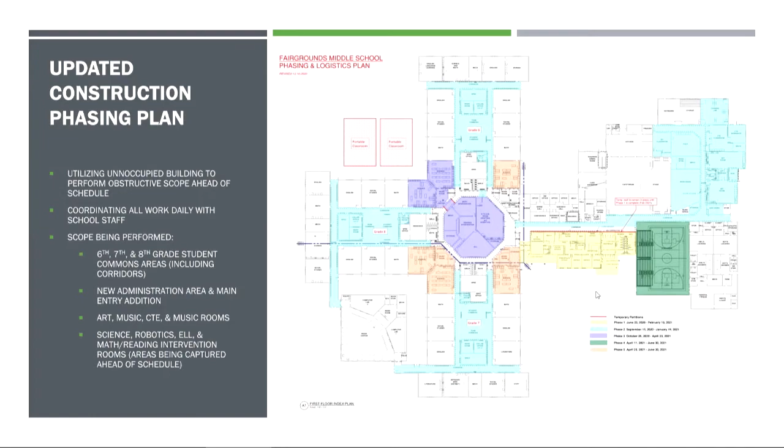As I mentioned earlier, not a whole lot has changed with the temporary classrooms. We are going to be building some overhead coverage for the ramps and landings, so Mr. Smith and his facilities team don't have to shovel and maintain these ramps. It's a big safety item. Now that the snow is cleared, we'll be building those next week to make sure they're up and running for when the students return.

Here's a view of Harriman's design of the main entry. We should have some better photos next month once the masonry tarp is taken down for winter conditions—you'll see a photo of that later. But just a quick update of where that stands right now.

The foundations are complete, and this will be turned over in February, end of February. The concrete slab will be poured—a portion of it next week. Just the way things need to be built structurally, we have to place this slab in different sections, so unfortunately we can't do it all at once. The first of many will begin next week, and we'll continue working through there.

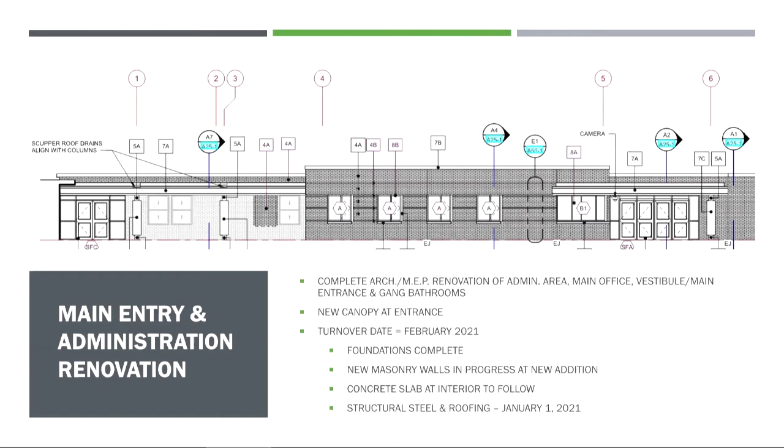Shortly after the new year, we'll be doing the structural steel and the roofing. We'll be weather tight, hopefully middle of January, and obviously shooting towards turning over the space at the end of February. So next month, I hope to have some nice photos for you.

This is the masonry tarp, as I mentioned.

So for those of you who aren't familiar with masonry construction, when you're building in the wintertime, you have to maintain temperatures above 40 degrees. So inside there, it's actually very warm. Due to COVID, I couldn't really get in there while the workers were there. There's about 10 of them in there working, so it's tight, and a lot of this work has been completed. We have heaters in there that we maintain as part of construction, and this should be coming down within the next few weeks.

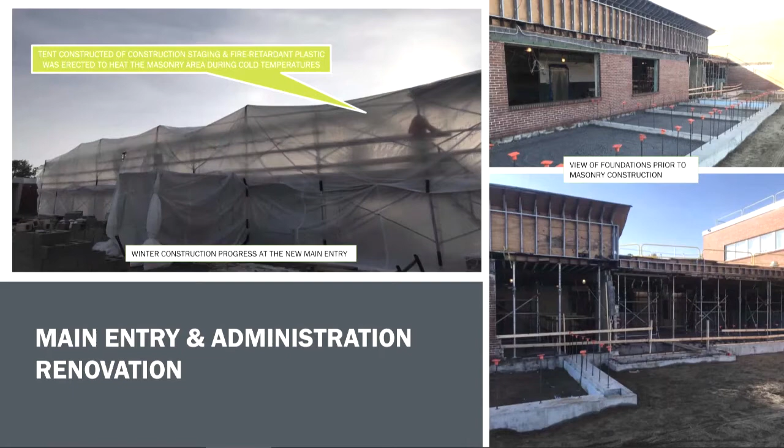This is just an example of something that we'll be reviewing tomorrow. This is the main entry when you walk into the school, and this is where the principal's office is. This temporary wall will stay up through the end of phase 1, the end of February, just to protect the students and staff from any noise or workers being separated from the students while the building is occupied. We are going to have finished flooring down in this area when the students return, which I believe will happen sometime over the next 2 weeks. So it's just an example of temporary partitions that we leave up during construction.

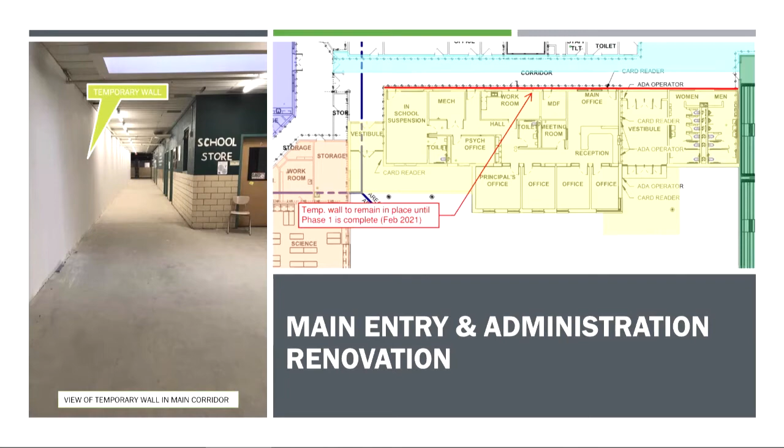This is an example of the new tech ed wing. On the bottom right-hand corner, you can see that we're starting to get the existing walls ready for paint. I believe they prime coated these today while I was there, so things are starting to take shape down there.

I think we have 5 new bathrooms that will be turning over in this phase. Ceramic tiling will be starting next week and continuing the following week, so that'll really make the spaces take shape. Here's another example of a toilet room across from the existing music room. This has since been drywalled, and again, tiling will be taking place next week.

I don't know if this group remembers, but we did approve a new integrated clock system. Here's an example of one of those clocks that has since been installed. Every clock in every classroom is on the same page, same bell schedule, and will all be tied into the PA system. That was one of the items that was added to the scope.

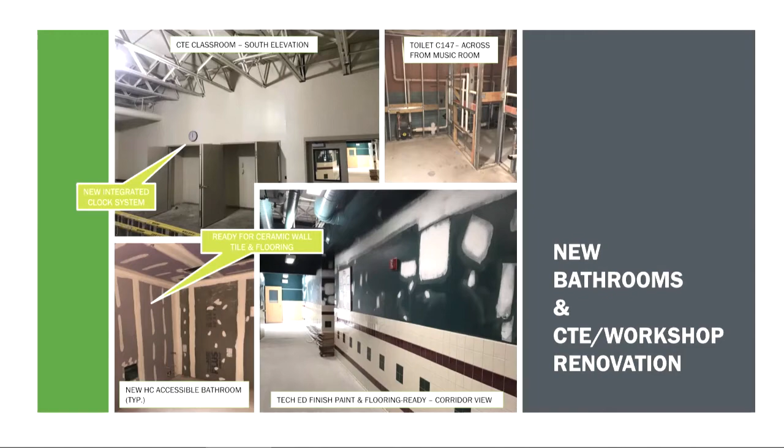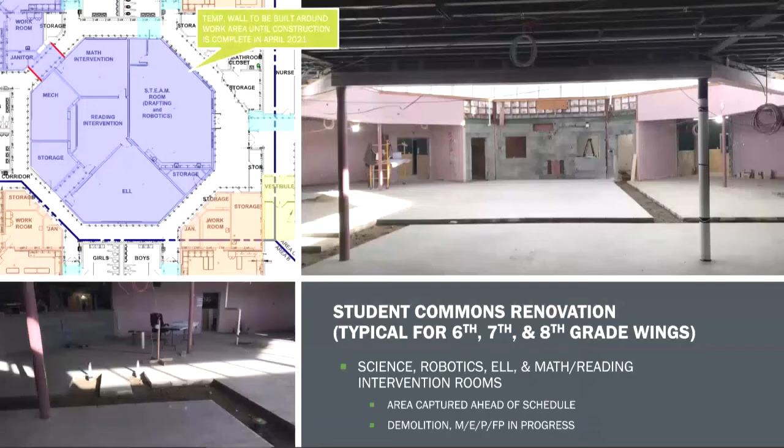Any questions regarding construction status and progress? Anyone have any questions? By the way, there is one of those collaborative areas in each of the grades areas.

When we can, anybody else who wants to take a trip to the school, maybe after the snow's gone and it gets a little warmer, we can arrange to have small groups visit.

Ms. Brown, do you have a question? Yeah, actually it was just regarding the color. I'm really glad that you didn't go with just a basic builder beige, but was the choice from the pictures, is that color more of a coral, or is it more of a pink, would you say, in real life?

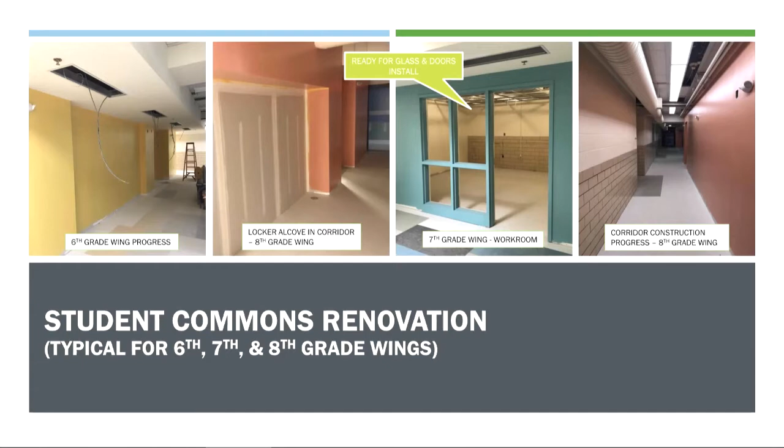More of a coral. Awesome, I think it's going to be cheerful. Yeah, Harriman has someone that specializes in those colors, so we had one color issue that we got resolved, but it looks pretty good. I like that blue and the teal, and I like the idea of it being more coral and less pink. Yes, less pink. There was a baby pink there at one point, but I think that's transitioned. So that's gone.

Let it be shown that Alderman Lu has joined us, and Alderman Gathright. So I think I saw Heather Raymond's hand first. Ms. Raymond? Yes, sorry, I can't see everybody.

So I just wondered if you could remind me of the furniture that is intended to go in those common spaces. I remember it was furniture that's able to be transitional. I just don't remember all of the details off the top of my head.

Yeah, this is Jamie Willett. The furniture design has not been done yet. The intended furniture would be a variety of furniture where you might have some areas of soft seating type area where kids could gather around, maybe a television area. You could have some sort of desk type areas or high tops so that kids could sit around and do some exercise work, not actual physical exercising.

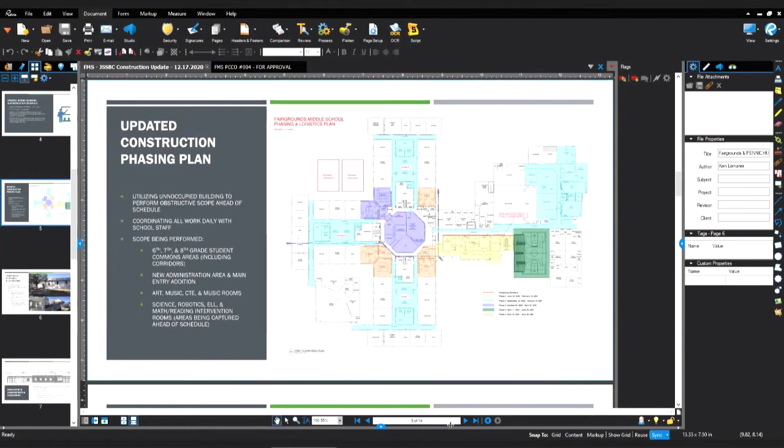Just one other thing in case it comes up later. In the gymnasium, the bleachers are on one side and the court will be sized to a middle school basketball court. It's a little bigger than that right now, but the specific size is for middle school. Those bleachers can pull out onto the court to house a bigger group of students, and they go back when there's a basketball game. They're all electronically driven. Any other questions?

Can I ask one more follow-up, Alderman Lu? Sure, yes. So the offices, I assume that looks like it's the entryway to the building. Can you give me a pointer where the students will enter the building?

I believe that's something we're going to be reviewing tomorrow in detail with the staff. Right now this whole front area is captured so we can safely work on this portion of the building. A lot of the students are going to be entering through the 7th grade wing, through this door, and there are a few other entrances they can also use, such as this door. Those are the items we'll review tomorrow with the principal and her staff, just to make sure we have the correct signage and everything is properly laid out.

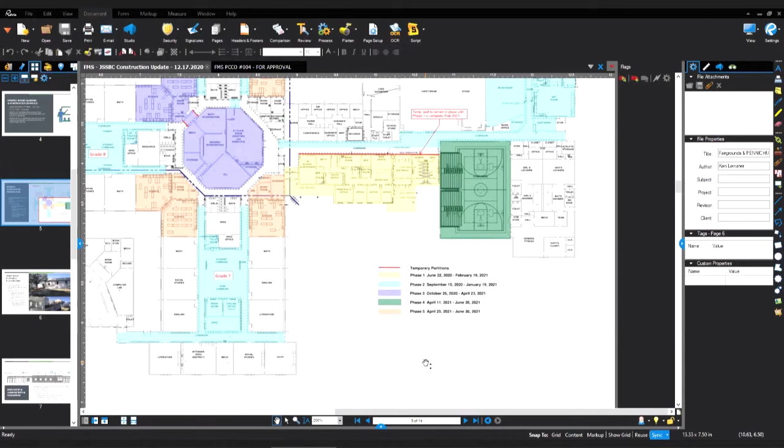Yeah, we can do a follow-up at the next joint special. Any other questions? Okay, Mr. Smith. Some people want to get paid.

Yes, actually Ken, don't you have a prospective change order to go through? Oh yes, number 12? Number 4, actually. Oh, 4. Oh, 12 is one we're not taking up yet. 4. Okay, go ahead Ken, you're on mute. Okay, thank you.

So this is this potential prime contract change order. Again, this is just to finalize an item that was approved by this group last month, and that was the upgrade to the new fire alarm control panel. That was for an added value of $51,086.90. So this document finalizes and approves the actual contract value by that amount. That is the only item I will be presenting tonight for added cost.

This item was approved last month by the joint special. So again, this is an administrative paperwork thing. We had already taken motions to approve the items that are in it, but this is doing the formal paperwork and the formal motion. So if somebody would make a motion to authorize the signing of change order number 4 as presented.